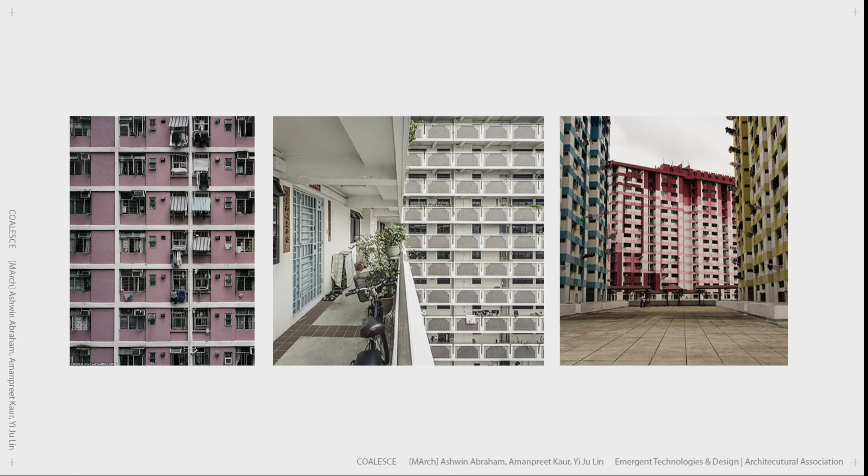Along with its efficient use of space and resource, mass housing still has several faults. That is, lack of social identity and communal space. These residential neighborhoods will not have the opportunity to adapt to future change over time. Overall, mass housing fails to address certain aspects of housing such as social cohesion and personal identity.

This leads to the question: what if the building can be reconfigured over time as a potential solution to the existing problem of inflexibility, and the people can participate in the design process as a means to directly address their special needs, with an intelligent system for helping people find a suitable solution. That is our research project, Coalesce.

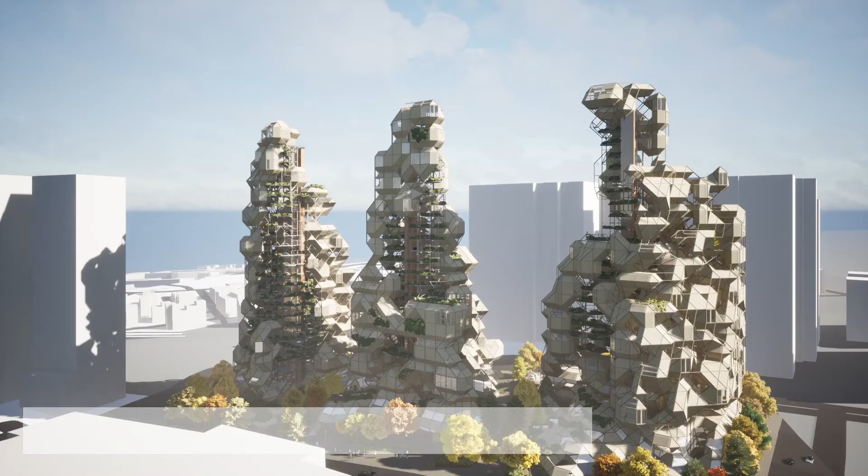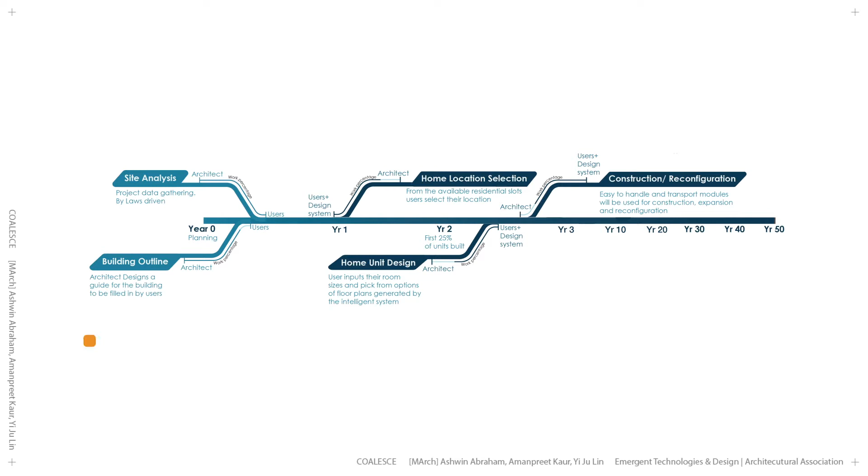Coalesce is a 400-home residential neighborhood that grows and is able to reconfigure according to the needs of the inhabitants, owners, and the surrounding urban context over 5 decades. The residential development is expected to grow, shrink, and reconfigure for over 5 decades. The different stakeholders such as architect, government, assembly workers, user, and multi-users will be involved at different stages throughout the years.

We propose 3 design strategies - sustainability, personalization, and adaptability - to change each part, from assembly to space planning, usage, user needs change, home adapts, flexibility, reconfiguration, disassemble and reuse or recycle.

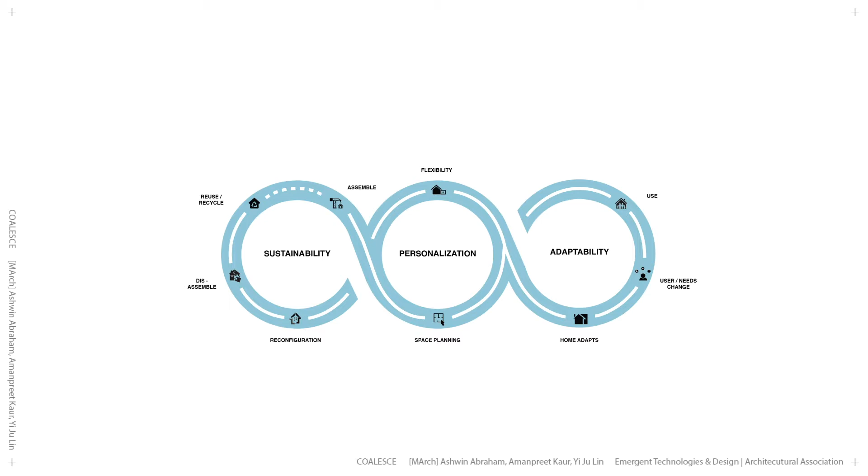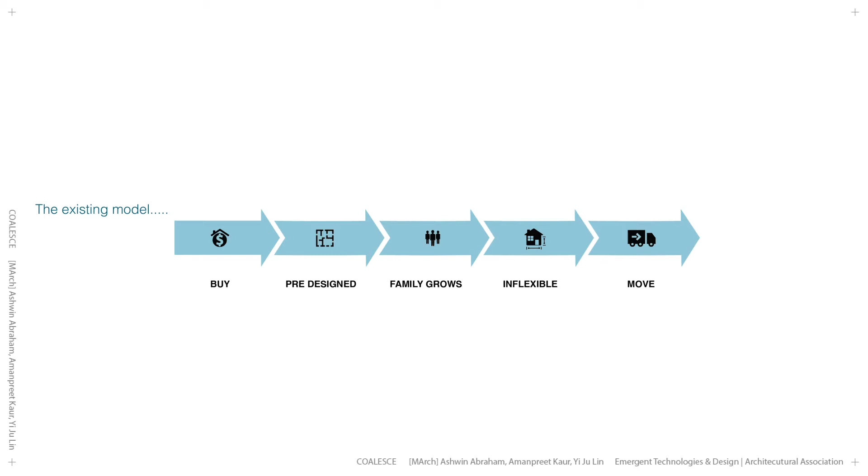We present a new degree of personalization. The conventional model is linear, has minimal user customizability, and is unable to grow or shrink in response to family size, and is replaced by a more cyclic one.

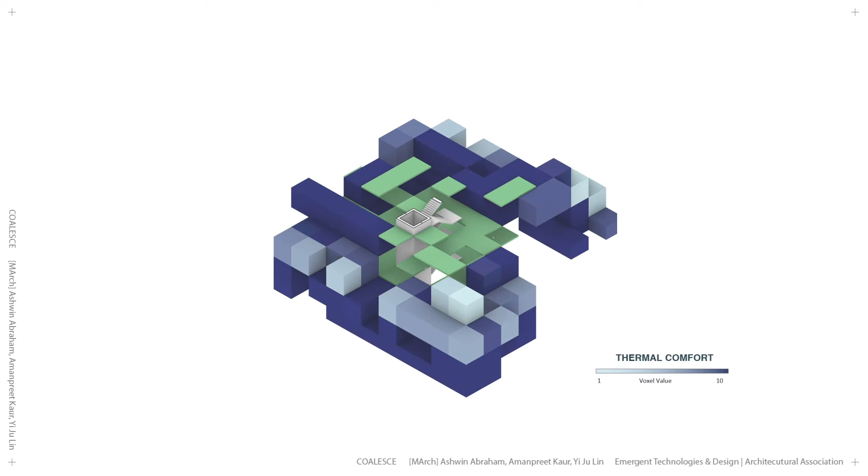Consider a user who is selecting their home voxels in a residential neighborhood. He has a certain family size and budget. The residential development's voxels would have values assigned to it based on livability factors like thermal comfort, views, and certain attractive community features within the development.

A clustering algorithm presents a range of options for home locations and their cost based on voxel values.

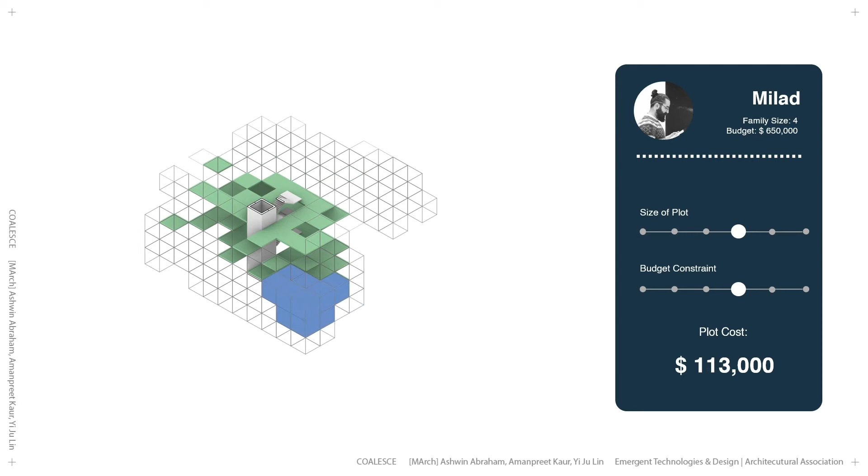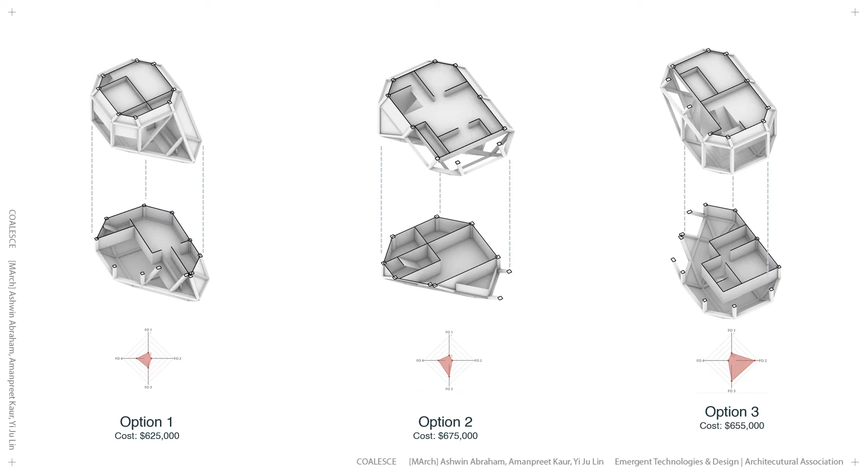Next, the user sets parameters for the size and location of the rooms of their home. A floor planning genetic algorithm generates 3 options and presents them to the user to pick from, along with their performance scores and cost of construction.

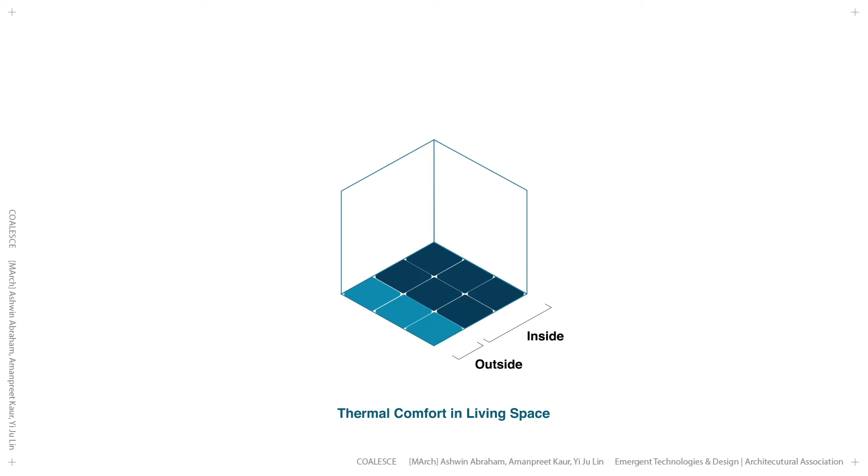In the floor planning algorithm, the following features are optimized for: thermal comfort of living spaces, proximity of built area to core, minimal cantilever, ventilation of living space, minimal internal circulation, and improved views for living spaces.

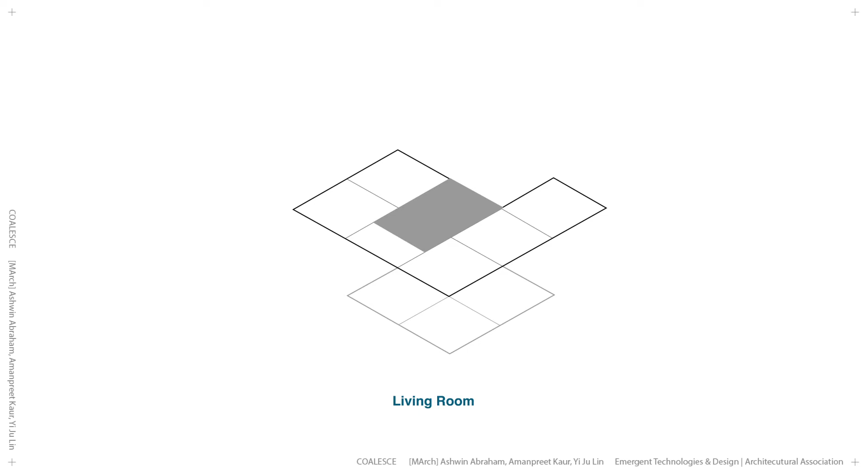Within the user-selected plot voxels, a shape grammar-based evolutionary algorithm is run. Genes are used to select the position of each room's start points and the position of room rectangles. Central spaces such as living and dining rooms, internal stairs and internal corridors are generated first.

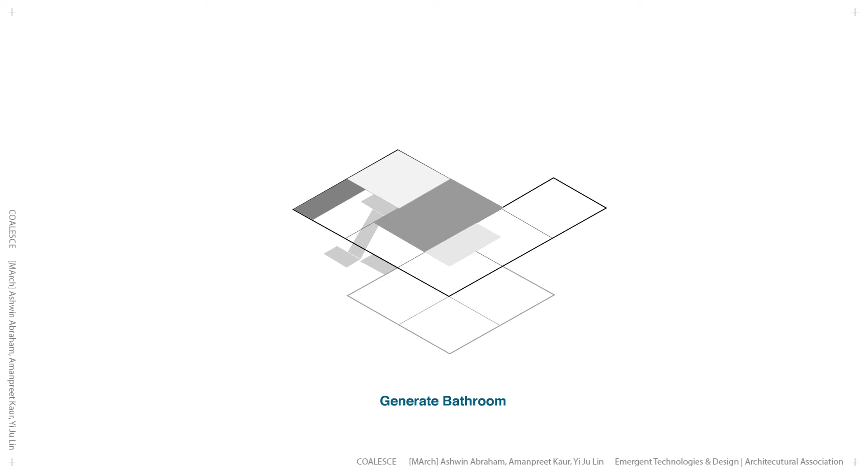The algorithm runs hundreds of iterations, learning over time, and outputs 3 good unit layouts that respond best to its unique context in the built mass. Our next strategy is sustainability through the proposal of a new building system.

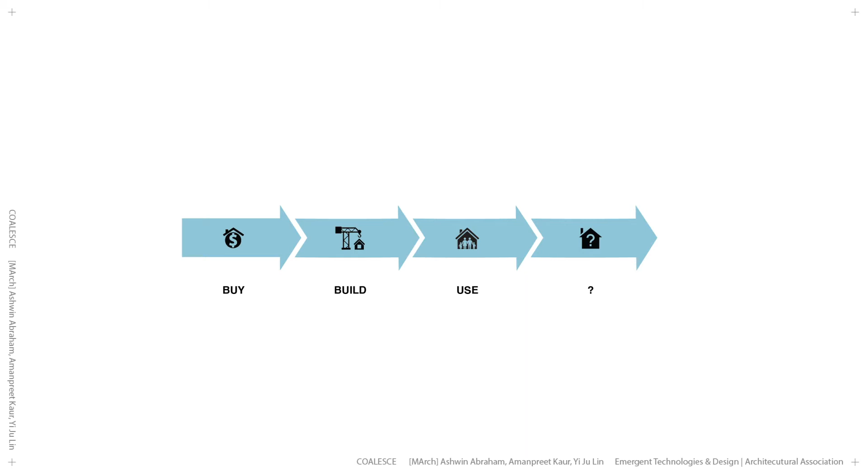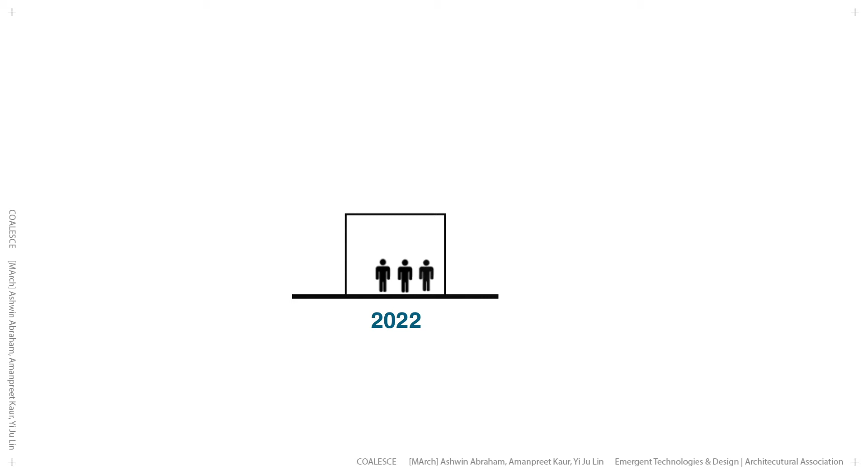A study of the existing building model shows that the life cycle of the material in use is not accounted for, leading to wastage and abandoned buildings. There is an expected change in spatial requirements to occur over the years, which the existing linear model doesn't accommodate, resulting in an endless succession of destruction and rebuilding.

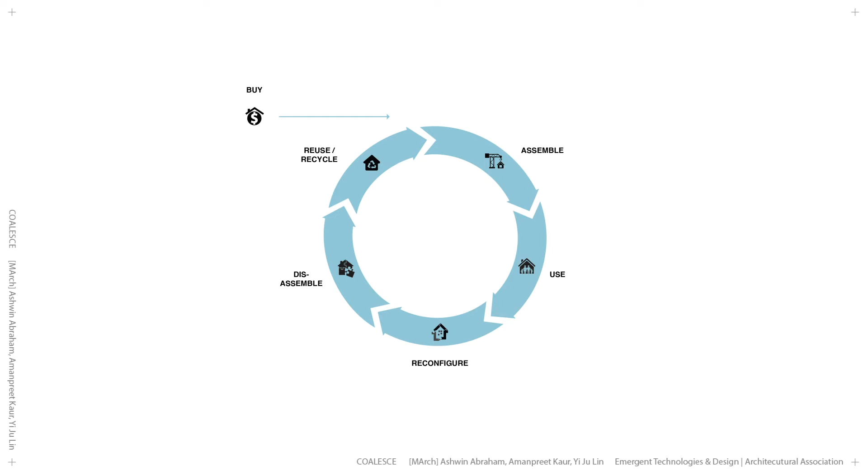The proposed strategy is to work with a component-based system, designed to achieve flexibility in assembly, disassembly, and reuse, allowing for easier, faster, and robust building developments through efficiency in prefabrication and manufacturing techniques. The proposed building model explores a more viable way to think about sustainable construction. Creative reuse, reconfiguration, and designing programmatically versatile buildings that last is the objective of this research.

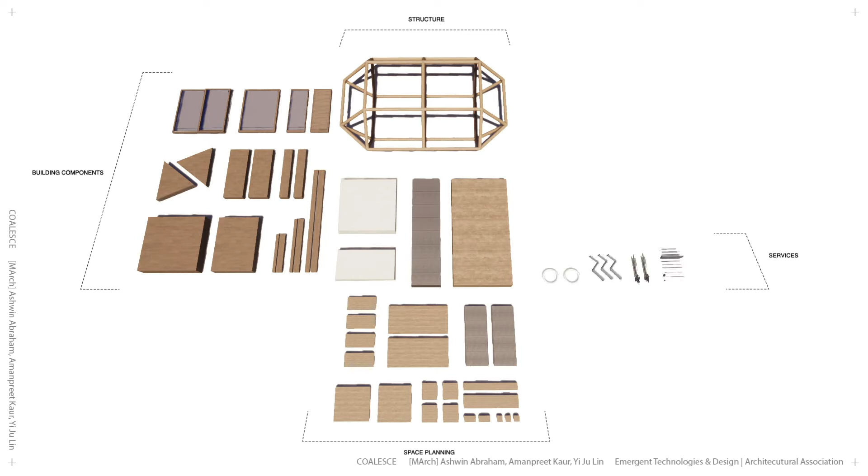The component-based system consists of the structure, building components, components for spatial planning, services, and interior detailing. The construction process begins with the extraction of timber and prefabrication of components depending upon user customization, which is then delivered to site where the assembly takes place to form the ready home.

This method allows for fast production, which is essential considering the increase in housing demand. It also allows for freedom of customization and quick assembly, which we can provide the users with.

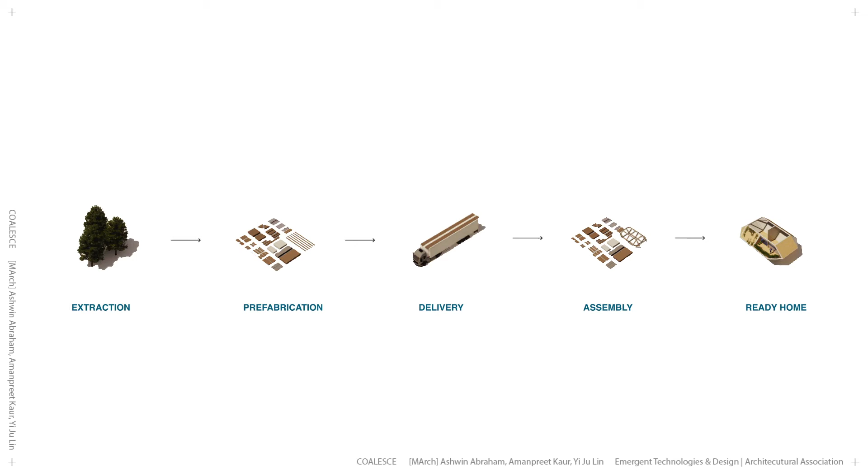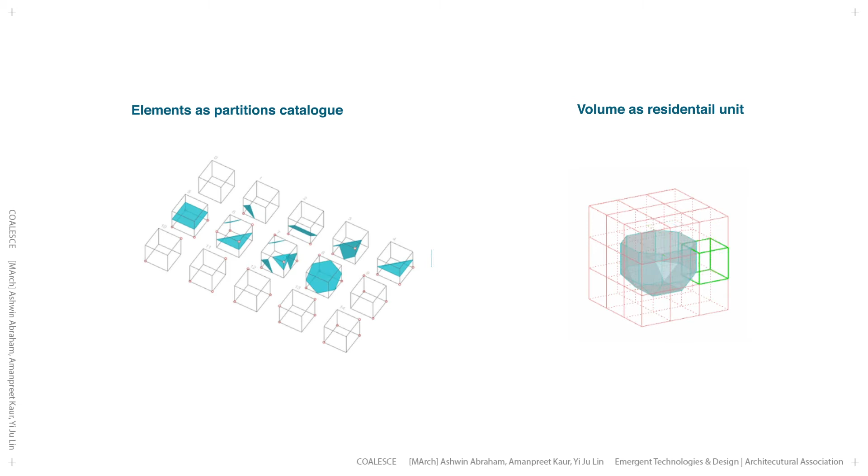For the design of this component-based system, we applied a marching cubes algorithm which uses a number of elements to create an enclosed volume.

The elements form the components, and the resultant enclosed volume is the residential unit. Once the final floor plan is selected by the user, the habitable volume is extracted from it, on which the material system algorithm is applied. A final unit morphology is obtained comprising of various building components.

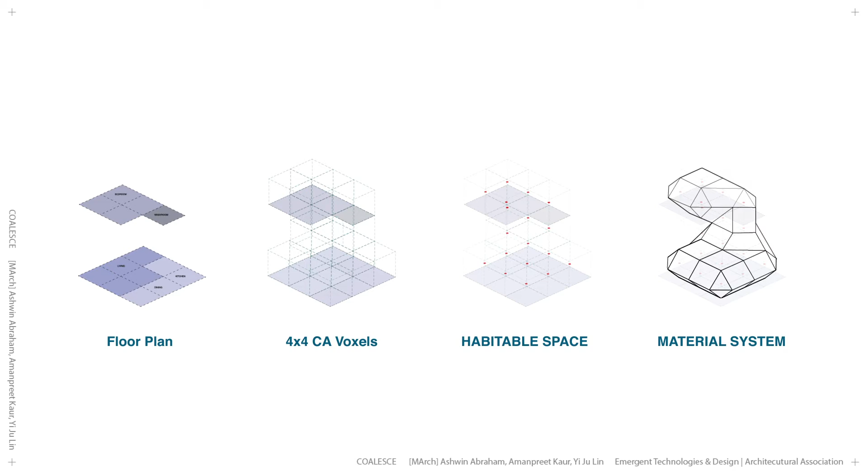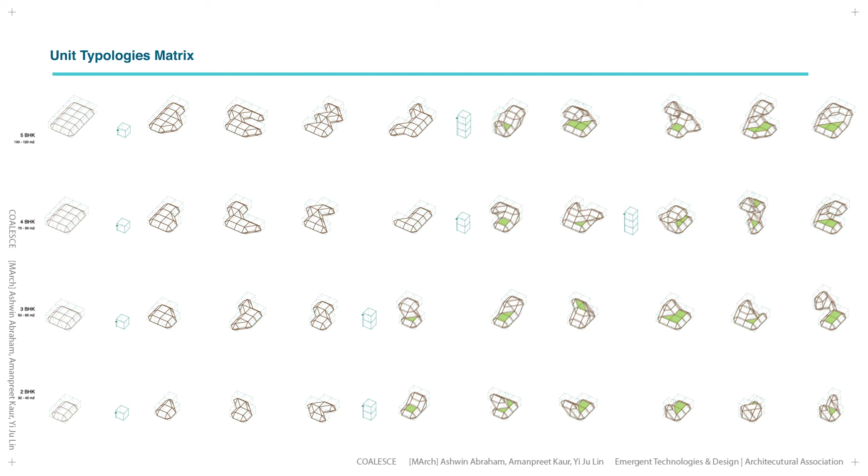The unit typology matrix highlights the morphological variations that can be achieved based on various floor plan clustering scenarios that emerge from user personalization. Vertical distribution of spaces within a unit is explored as a strategy to enable porosity and reduce the density of the resulting building mass.

As highlighted, such a distribution creates interior space and terraces of varying scales and spatial qualities. Each unit has a unique morphology and spatial character as a result of personalization.

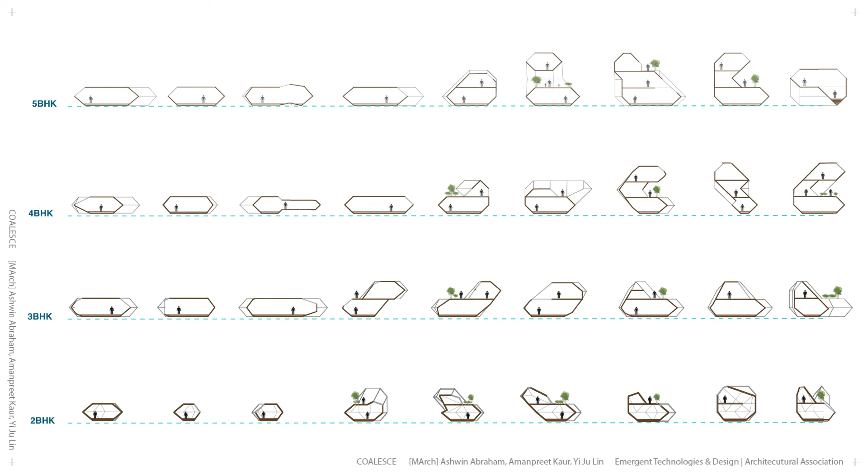Each user is allowed to customize the unit facade from a provided catalog depending upon their preferred utility of space, such as terrace skylights and vertical gardens.

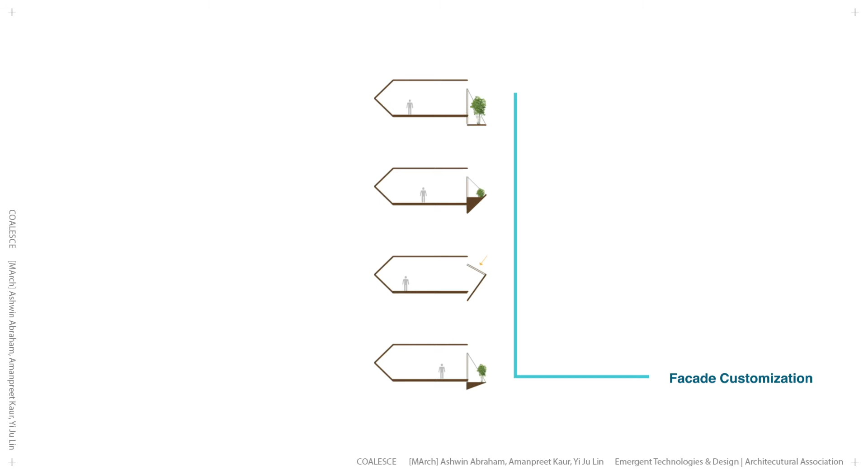Our third and last strategy is of adaptability. There is very little consideration of the user and space relationship in the existing building design model.

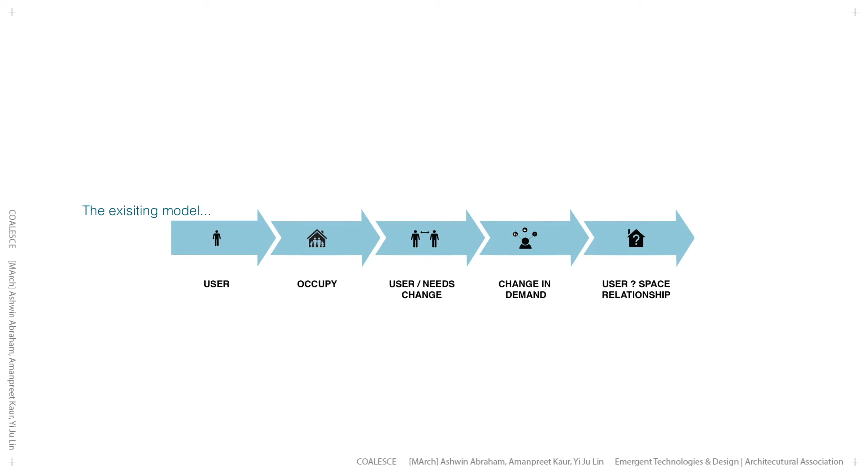Through our proposal, we aim to provide an account for change in demand through adaptable spaces and space trading over the years, defining and enhancing a relationship between users and the space.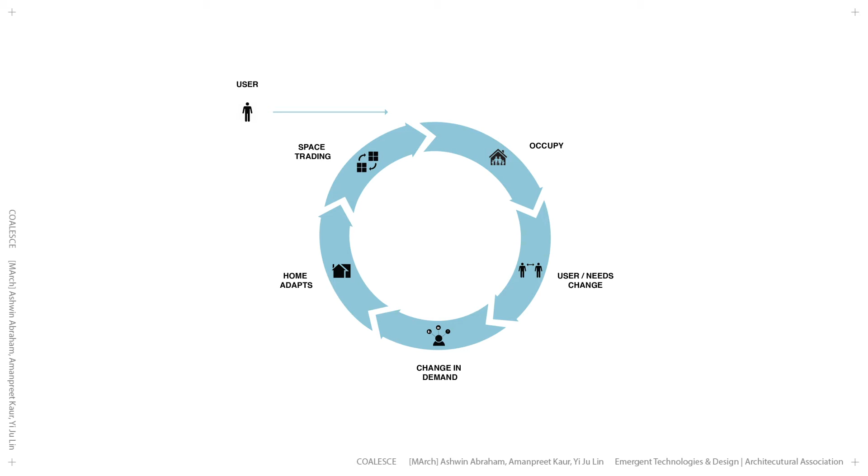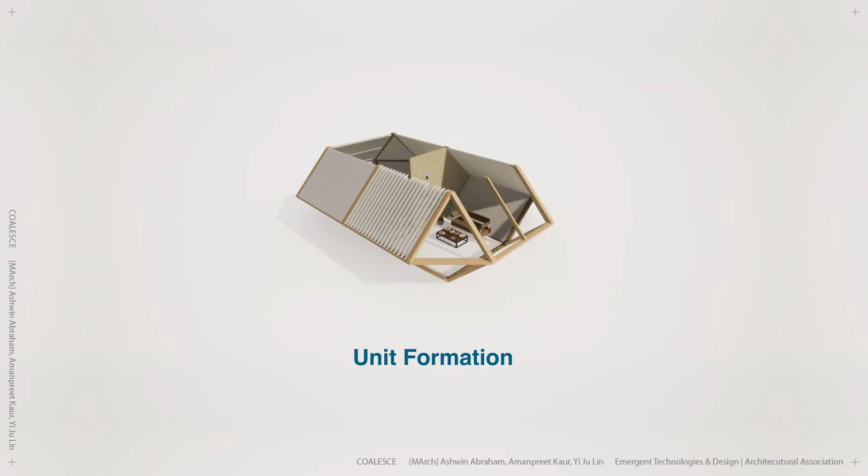A unit is formed by its structural components first, followed by the exterior panels, internal partitions, and space-making components. The user can further personalize their space by selecting through a range of partitions through a provided catalog.

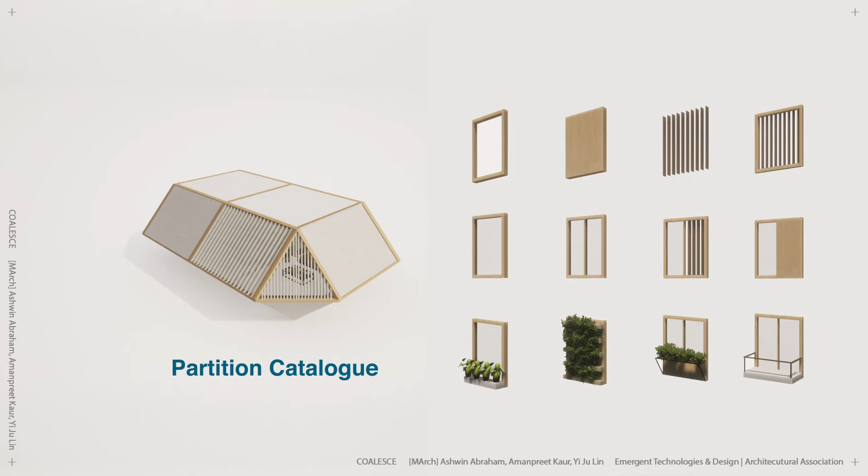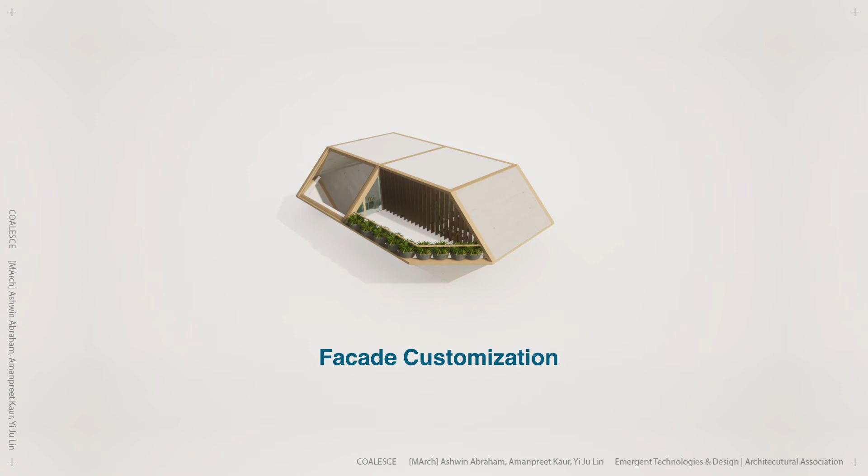This catalog is designed by the architect in relation to the context, resulting in unit formations which are environmentally responsive. Users can opt for terraces, roof gardens, large openings, etc., based on their seasonal requirements.

Units can be clustered onto site over the years. As and when the units are built over time, unit terraces can be activated as public spaces depending upon adjacency and edge conditions.

The involved users come together and make decisions at the communal level on the nature and scale of space to be created.

This approach allows for users and other stakeholders to be more involved in space making for changing social structures of society.

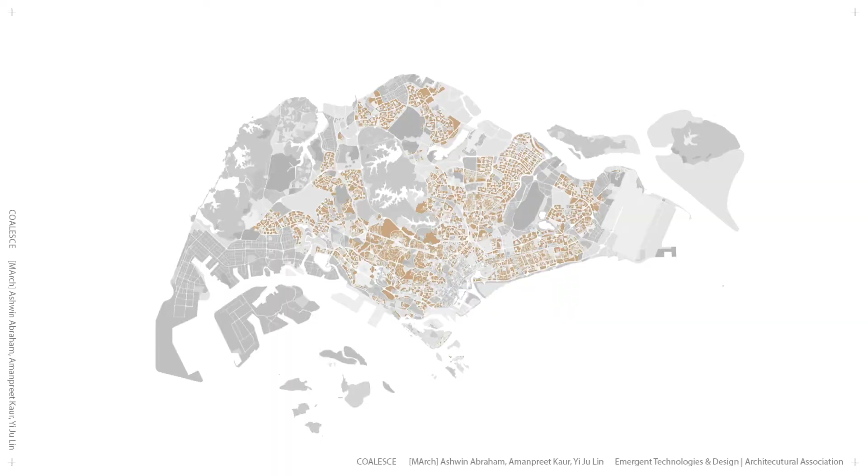In Singapore, it has high density of mass housing. 80% of Singaporeans rely on HDB flats. Such high density of mass housing is why we select Singapore as a site for our project to test the workflow.

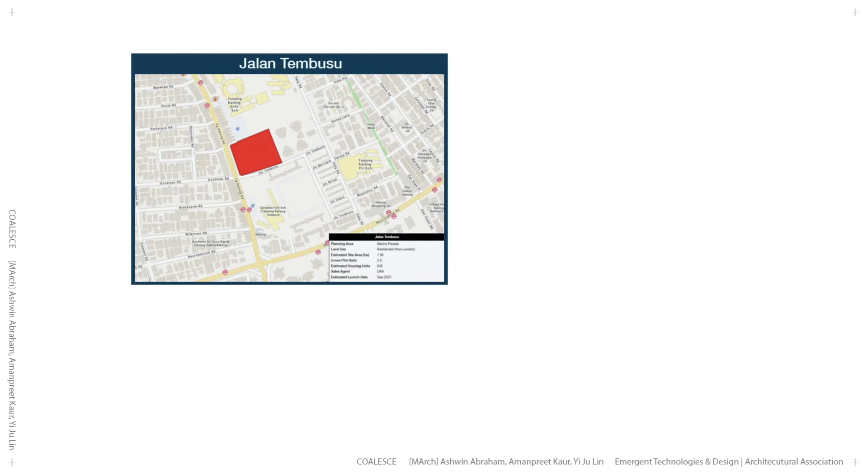The GLS program in Singapore laid out available sites for development, and we use this as the guide for site selection. We pick one of these proposals, that is Dairy Farm.

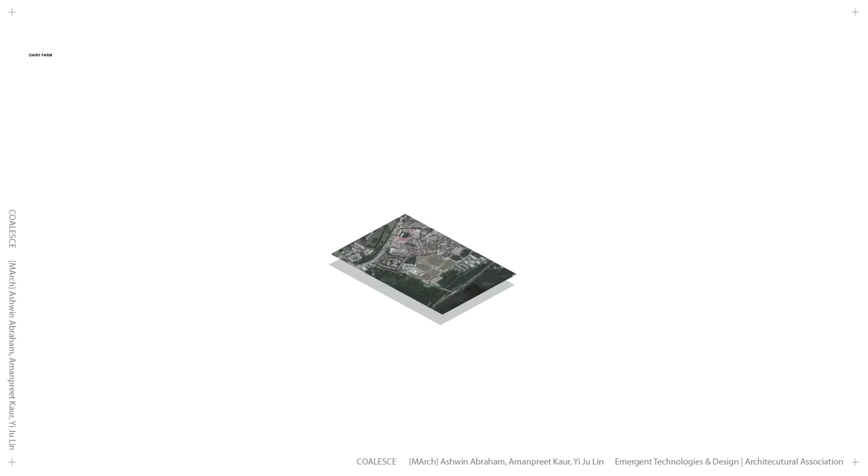Nearby this location has 2 national parks, 2 convenient expressways, and one international school. The area is about 1.56 hectares and the estimated unit number is about 385.

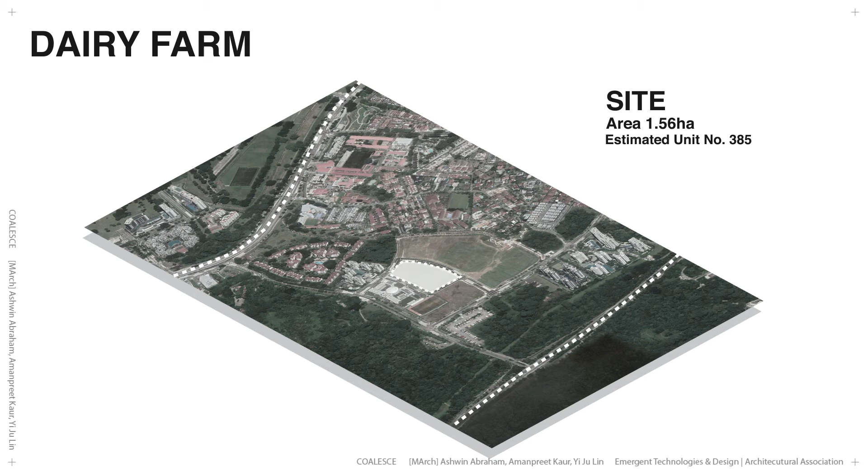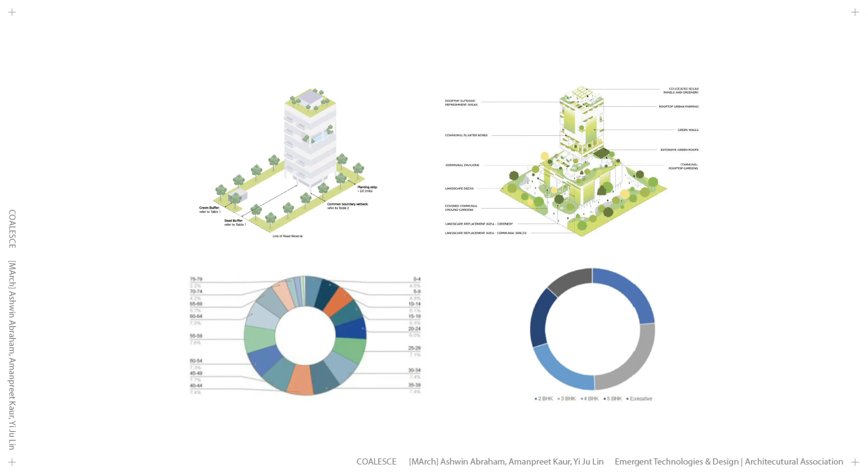The population in the region is increasing over the years and the majority of the population's ages is around 15 to 64. The Singapore Building Guideline will be referred to as a guide to set up the logic and rules for the experiments.

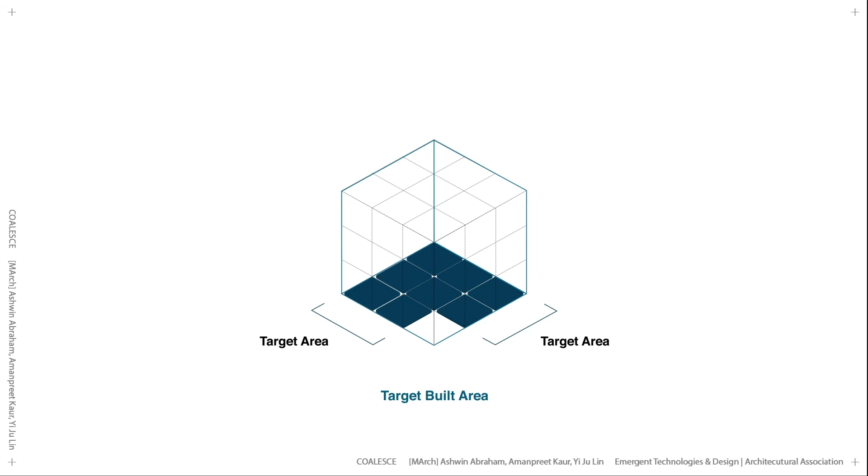A tower outline is designed as a guide for users to build their homes. A GA is designed prioritizing reduction of thermal radiation for homes, achieving the target built area, achieving target public residential ratio, and reducing self-view.

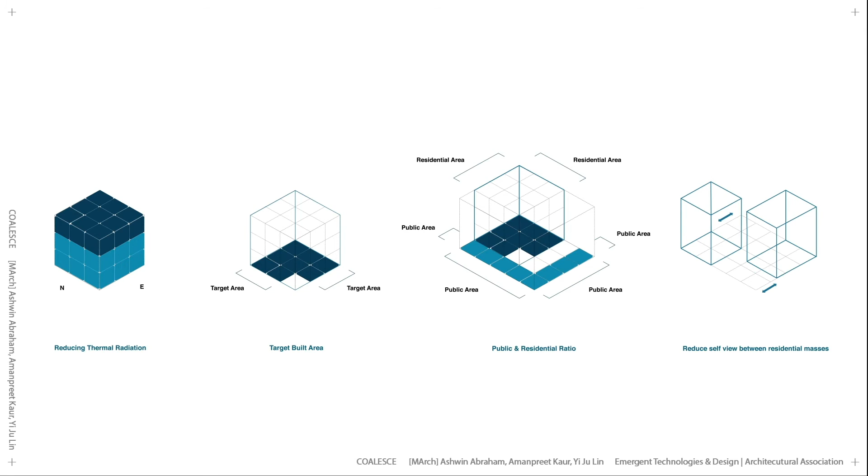Based on the surrounding pedestrian and public transport networks, a primary site axis is defined. Secondary axes fragment the large footprints.

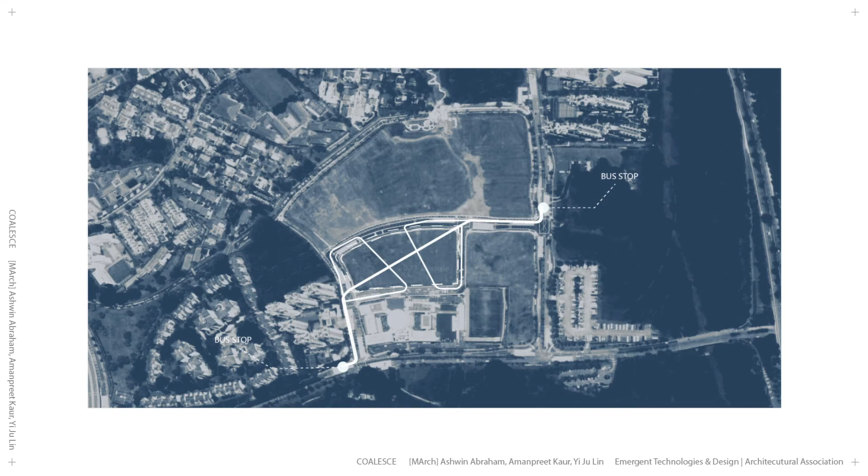The building footprint is extruded upward, tapered, and scaled by the genetic algorithm. A three-dimensional cellular automata algorithm populates the outline, and residential and public voxels are defined.

At the heart of each of the three towers is a circulation core. The material system defines a permanent framework.

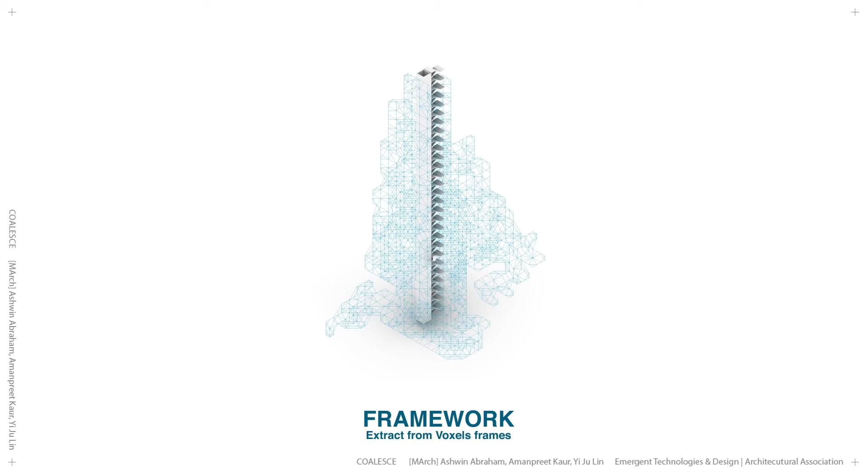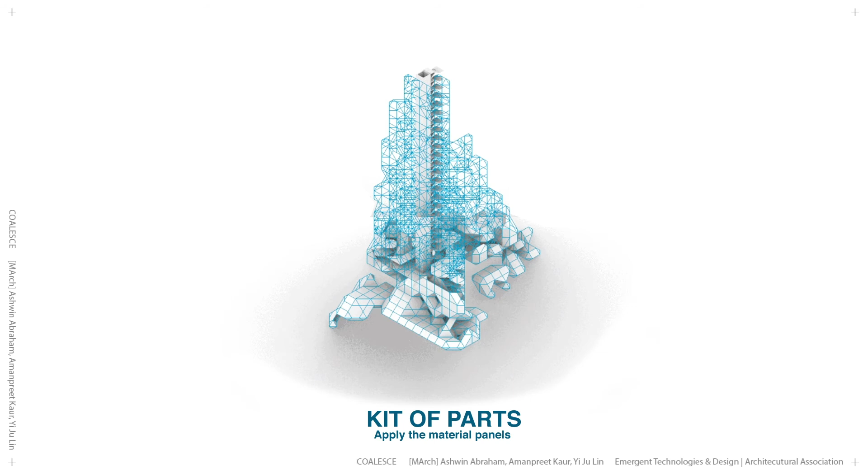Individuals build onto this predetermined framework over decades, using the flow layout algorithm and a kit of parts as infill panels. The framework and residential voxels are predetermined and therefore allow prediction of the location and magnitude of structural loading,

while maintaining user freedoms by allowing them to customize infill panels. Thus, a finite element analysis can also be conducted to predict structural behavior.

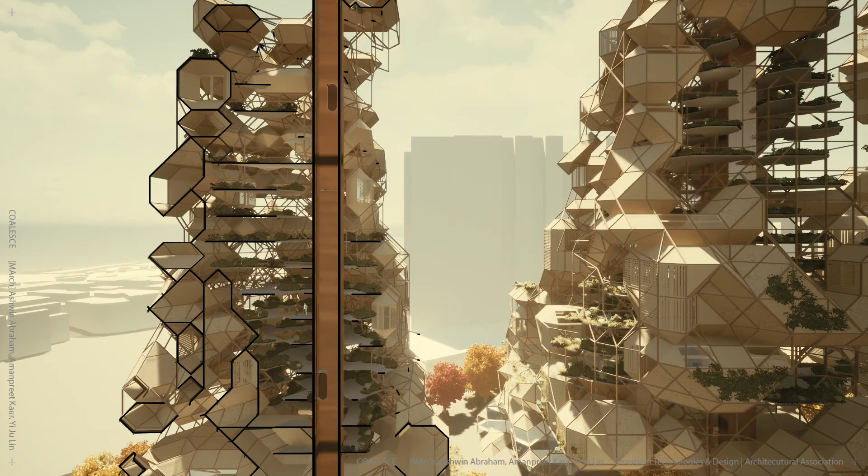This is the section of the three towers. Public space is located in the center, surrounded by the living units.

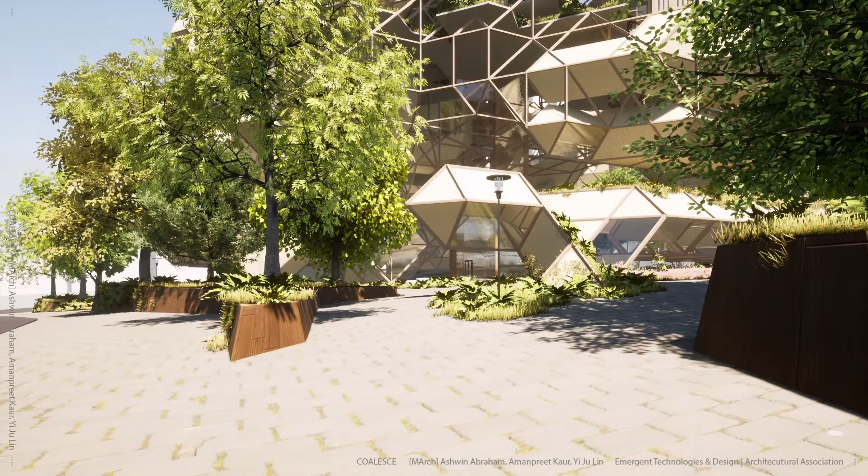And finally, let's take a minute's walk through this entire space.